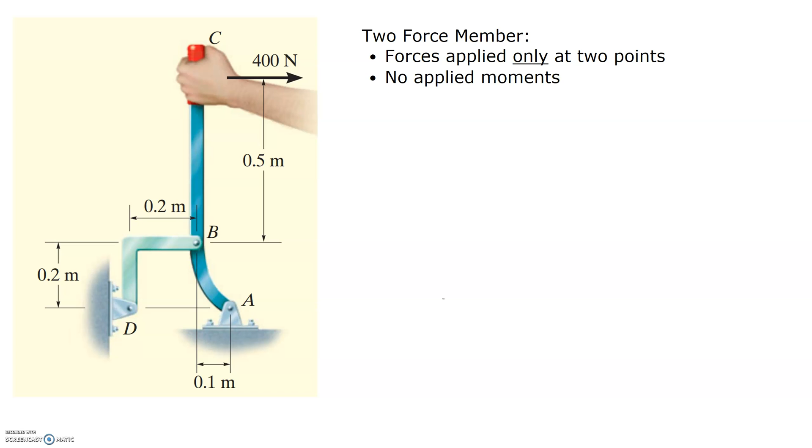In this video, I want to talk a little bit more about two-force members. Recognizing a two-force member can really help us when we're drawing our free body diagrams because it reduces the amount of unknowns we have in our equation.

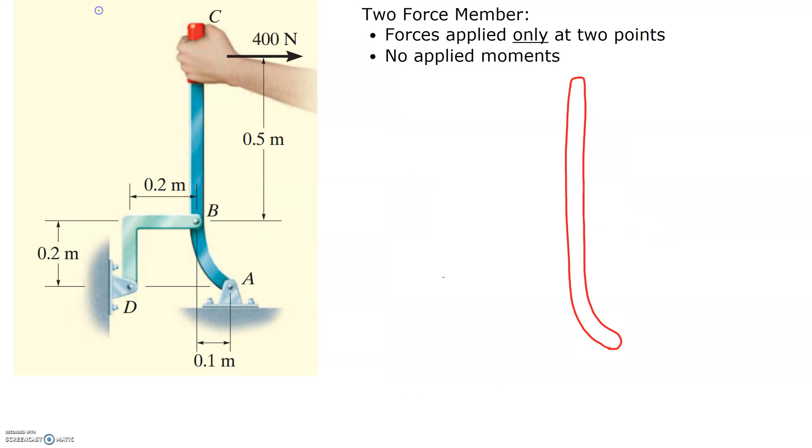If I look at this member ABC here, and I recognize that there's pin connections at A and B, I could draw my free body diagram with the 400 Newton force that's applied at C, and then I'll draw a pin connection at B, which has an X and a Y component. I'll draw it this way.

When I draw these vectors, it's a little bit arbitrary which way you draw it. You just need to make sure you match your signs when you write out your equilibrium equations. And then I have a pin at A.

Now, if I wanted to solve this problem, I have all the geometry for this shape, and I have three equilibrium equations. My sum of the forces in the X, sum of the forces in the Y, and my sum of the moments all have to be equal to 0. But I have four unknowns. I have By, Bx, Ay, and Ax. So I'm going to be kind of stuck here unless I can simplify this problem.

Well, I can look at this little linkage here, BD, and I'll draw a free body diagram of that to show you that that's a two-force member, and that simplifies our problem. So let's look at this linkage here, BD. I'm going to draw my forces here for BD. At point B, I have a pin, and I'm going to draw them equal and opposite to what I drew in the other diagram. So this is going to be By, and this is going to be Bx.

And so recognizing that this force over here is the force of the linkage BD pushing on member ABC, and this force here is the force of member ABC pushing back on the linkage. They're equal and opposite forces. And then I'll draw my forces at D here. So I have Dy

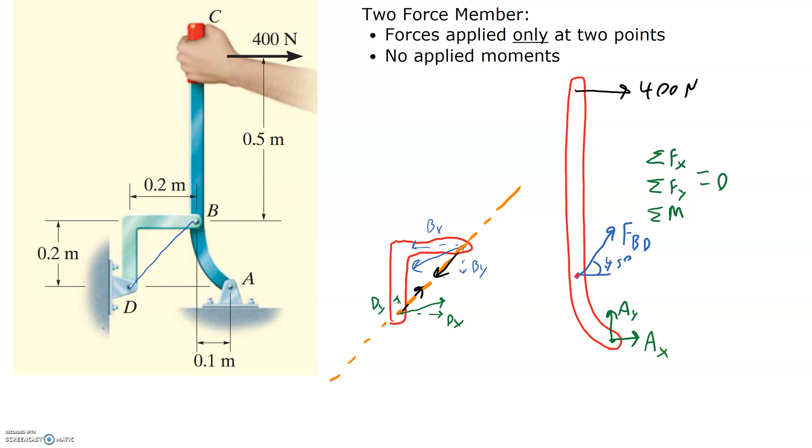Now, when I try to solve this problem, I only have three unknowns associated with it. So a lot of times we'll see members when we have a weightless link that's connected by pins on both sides. That should be an obvious clue to you that it's a two-force member. But it doesn't have to be connected by pins on both sides.

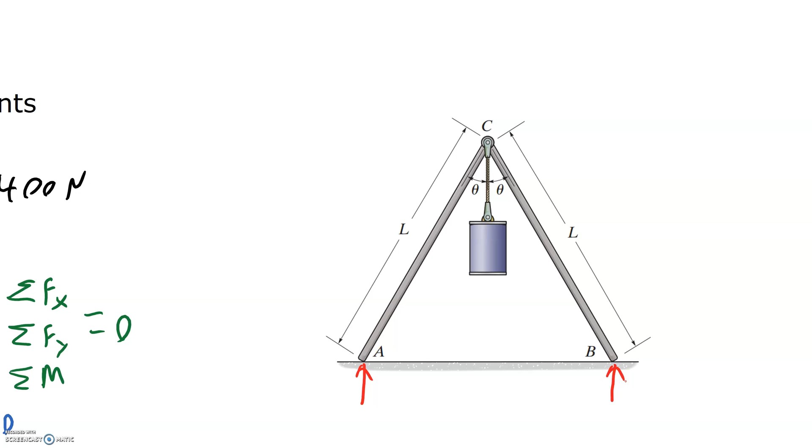So I wanted to look at this problem here. And this is going to be a problem where we're going to have to use friction to stay in equilibrium, and that's something we talk about later in the course. If we just assumed that we had normal forces here, if I drew this member AC, let's draw that member out. So I have AY, and I have maybe some force at C acting from CB, and then I also have some weight acting down on that member.

If I look at this problem without friction, if I take the moment at this point, it's going to want to rotate this way. That's intuitive. If this was a super smooth surface, this device would want to slip down and do the splits if we didn't have friction. But if we have friction, notice there's no pin here, then we know that the friction in the x direction has to be equal to the force pushing back at C, and AY has to be equal to the weight pulling down.

And if I think about the components of those, if I add AY and friction together, they have to act along this line of action. Any other force, if I had it acting at any other angle, we'd have a couple, and that would cause this thing to want to rotate. So this member, even though it's not connected by pins on both sides, is going to be a two-force member. And same with the member here at CB.

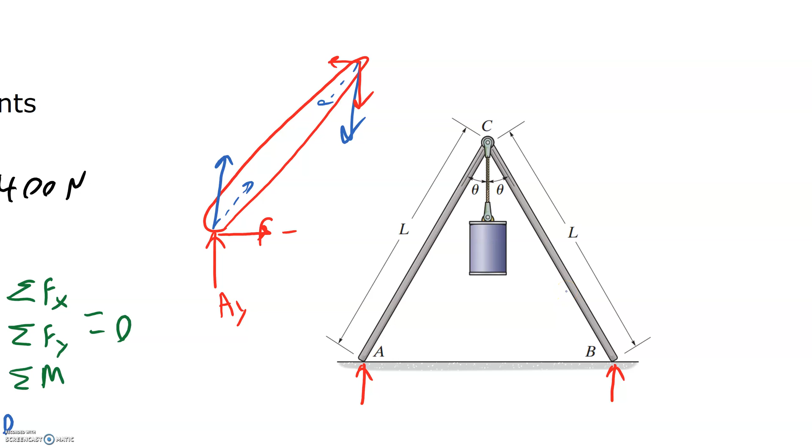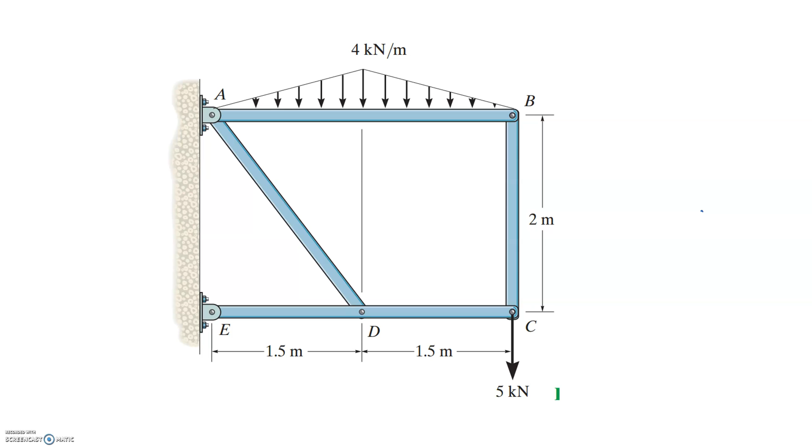One more example. This is going to be called a frame, and it's supporting a couple different loads here. And we'll learn how to analyze this later on in this class. But right now, I just want to try to identify what members are two-force members. So we have 4 members that make up this frame. We have member AB, which is connected by pins on both sides. We have member BC, which is connected by pins on both sides. We have AD, and we have this member here, EDC.

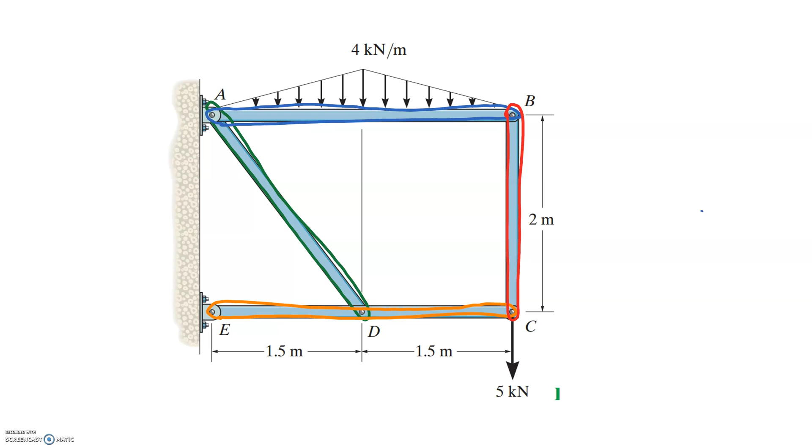Let's start by looking at the top member here. It's connected by pins on both sides, but that's not the only criteria for it being a two-force member. It also has this distributed load pointed down, which we could simplify with a resultant force acting right in the middle of the beam. So this has forces applied at more than 2 points along the beam: at A, in the middle, and at B, so it is not a two-force member.

What about AD? Well, this has pin connections on both sides, and if the mass of that member is negligible, then yes, that's going to be a two-force member. It only has forces applied at point A and point D. So we'll highlight that one as a two-force member.

Moving over to BC, it has forces applied at the pin at B and forces applied at the pin at C. It also has this 5 kilonewton force applied down here at C, but that's applied at point C. So we still only have forces applied at points B and C and nowhere else on the beam. And so that's going to be a two-force member.

Last, we have this member here, EDC. It has pins on both sides, but it also has the force of this member coming down the middle here. So with forces applied at 3 points, it's not going to be a two-force member. So the two-force members in this problem are going to be AD and BC.